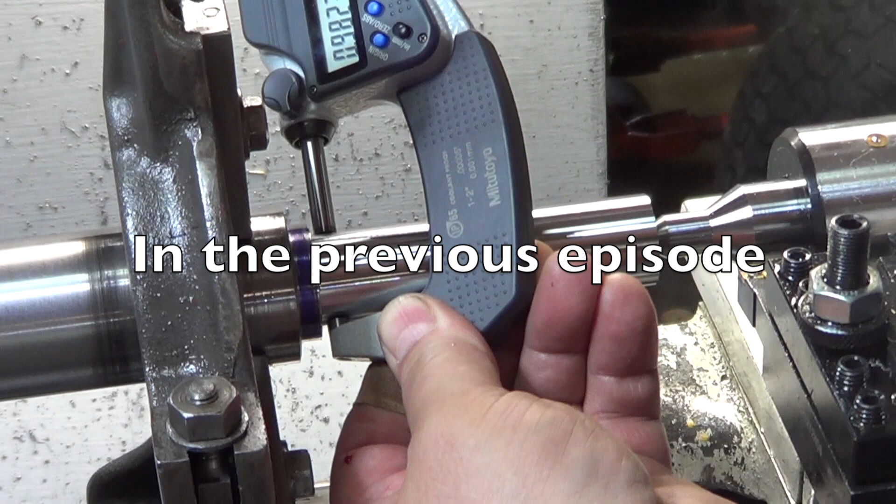I can't believe this. I overshot by 1/1000th of an inch. Oh my god.

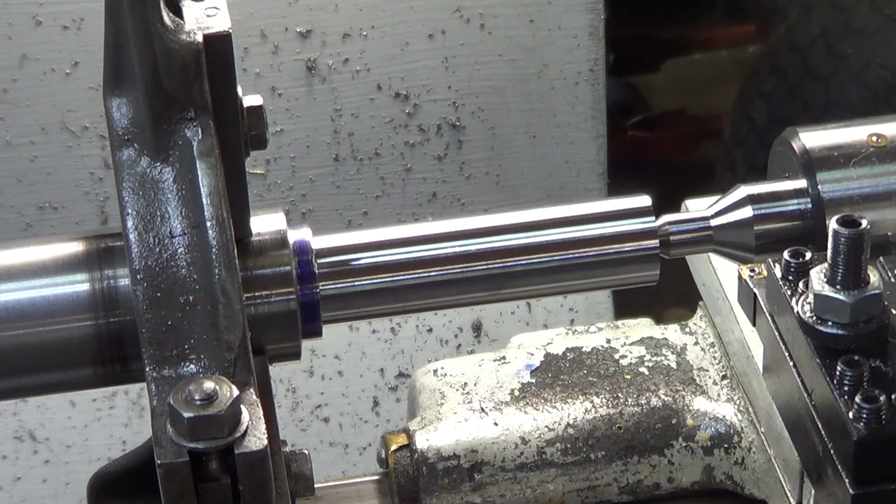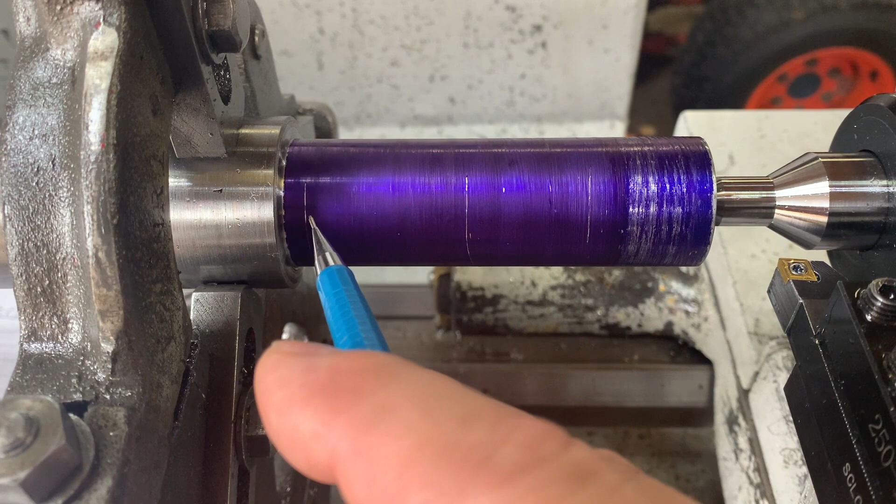So now that I've turned down to establish a shoulder for the bearings, I've made 3 marks, as you can see. That'll be the end of that. This is going to be the shoulder for that nut, and the end of the bearing journal, and this is where the taper is going to start, to the end.

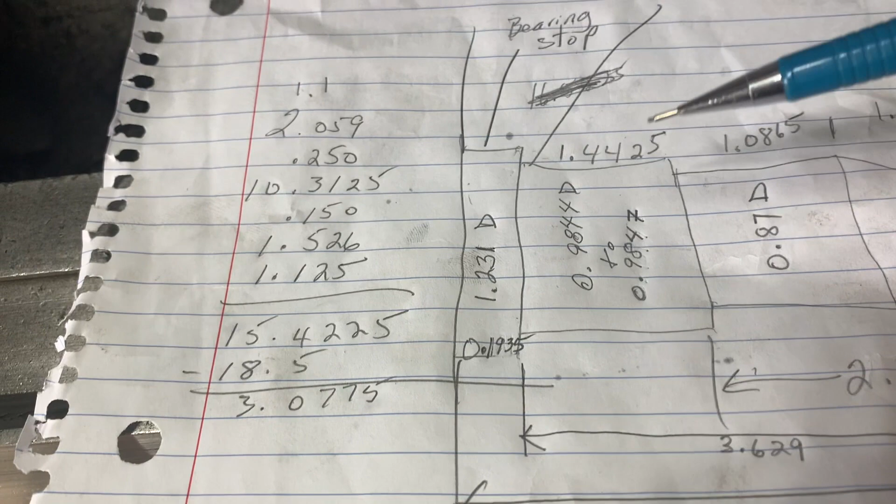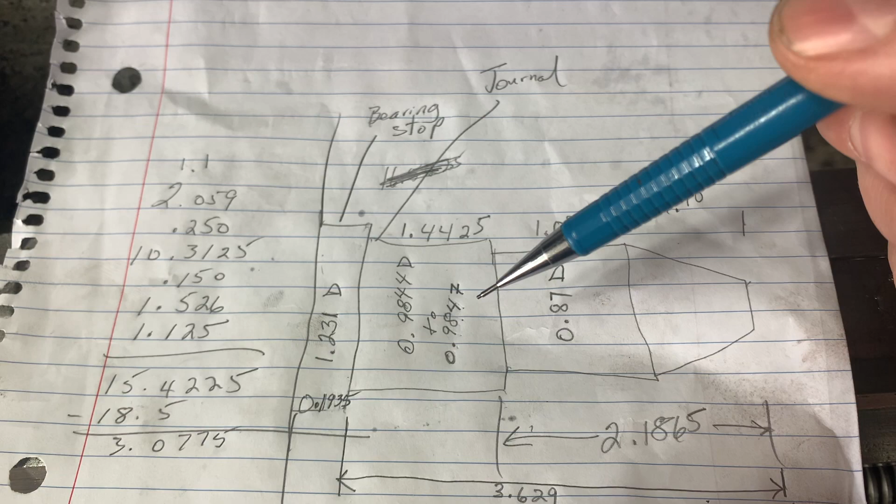This portion is the bearing journal, and it needs to meet critical measurements and tolerances. We're going to be between 0.9844 to 0.9847 to meet the high precision standards established in the machinery's handbook. So this is, other than concentricity lengthwise, the most important part that I have to make on this shaft.

It's been 3 days since I worked on this spindle because I wanted to quadruple verify all my measurements and whatnot. So now I'm ready to start.

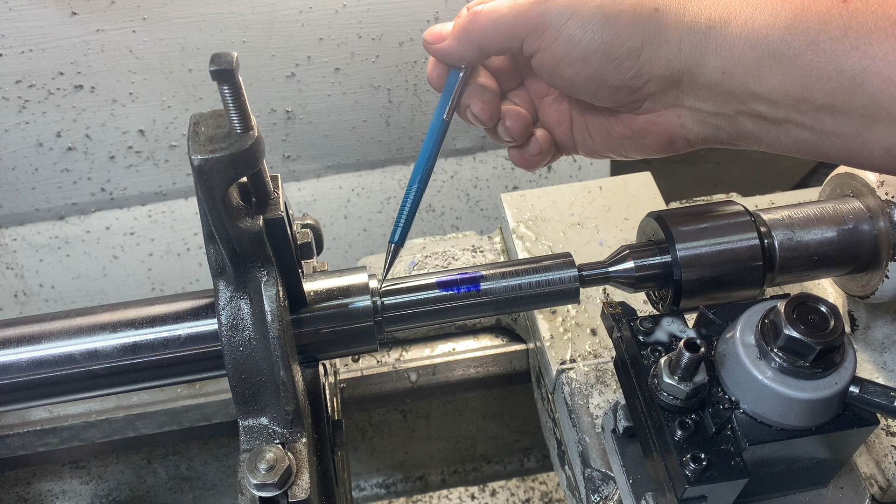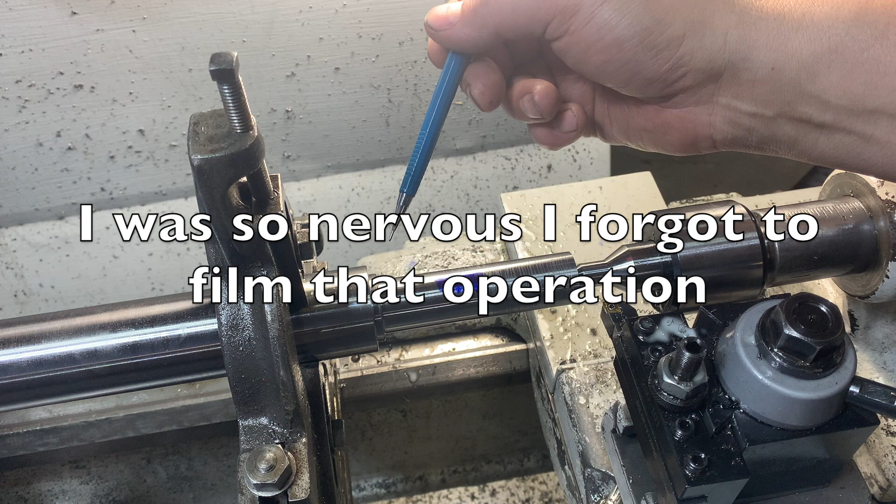So let's measure this out. I'll show you my measurements. This is the first measurement, 98485, that's in hundredths of 1/1000s. So I had to go 9847. 1.5 is good enough for this kid.

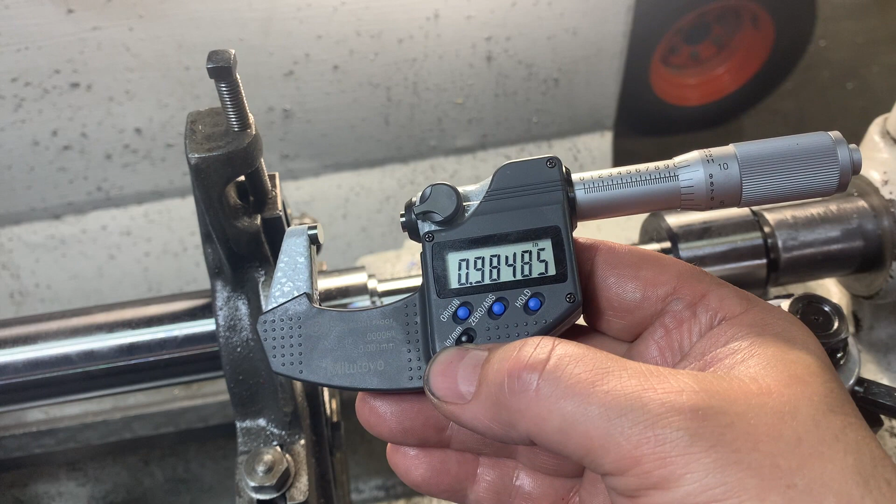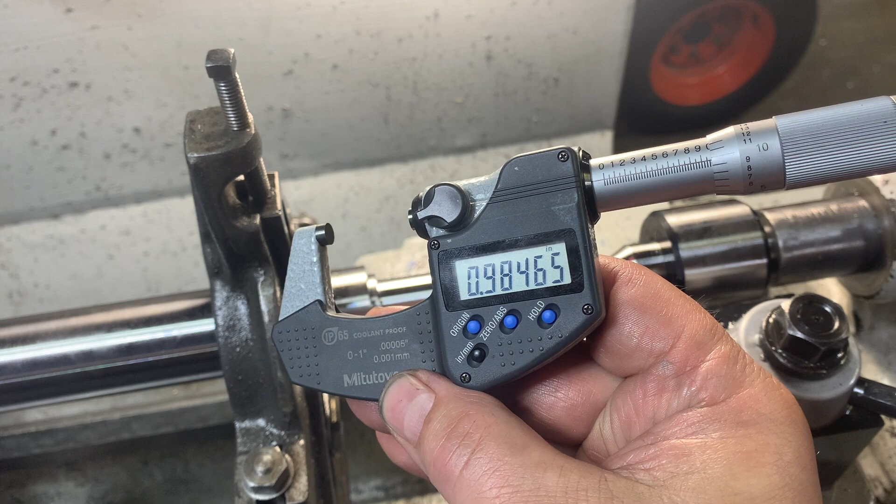Let's shoot in the middle and see what's going on there. 98440, again within tolerance. Last one. Okay, so this one is 98465, tolerance again from 3 to 7, so 6.5 is more than great.

Very happy. Okay, so we established this was my critical dimension that I needed to achieve for the bearing journal. This is the shoulder that the nut is going to sit against and provide axial preload on the outside diameter of the bearings going in that direction.

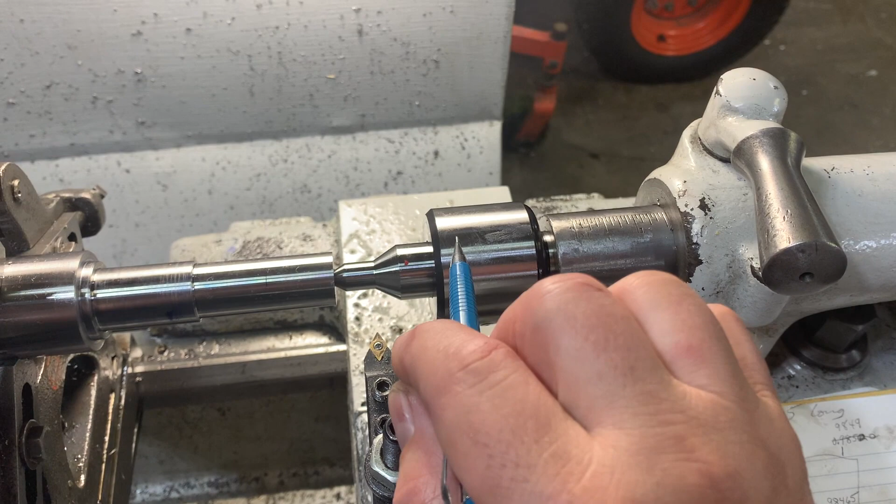So now I've turned this down already to a diameter of 870 thousandths of an inch. Now the critical time is to make the taper, which is 7.125 degrees. For best results, I'd want to keep my live center in, which means I need to have my compound going in this direction. So I may have to move my steady rest back a bit in order to clear the compound.

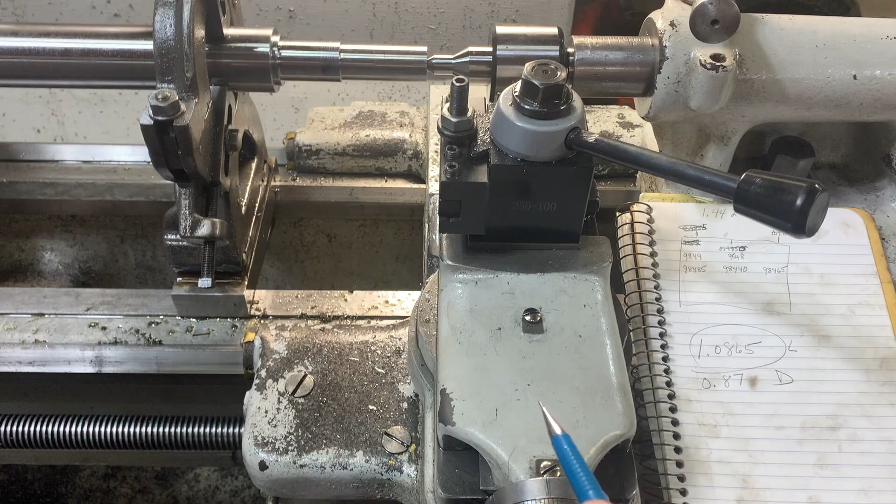So now I have to decide how I'm going to set my compound angle. There's different ways to do that. I could remove this whole assembly, but that would be counterproductive because lining this up is difficult. So I think perhaps using a compass would probably be best.

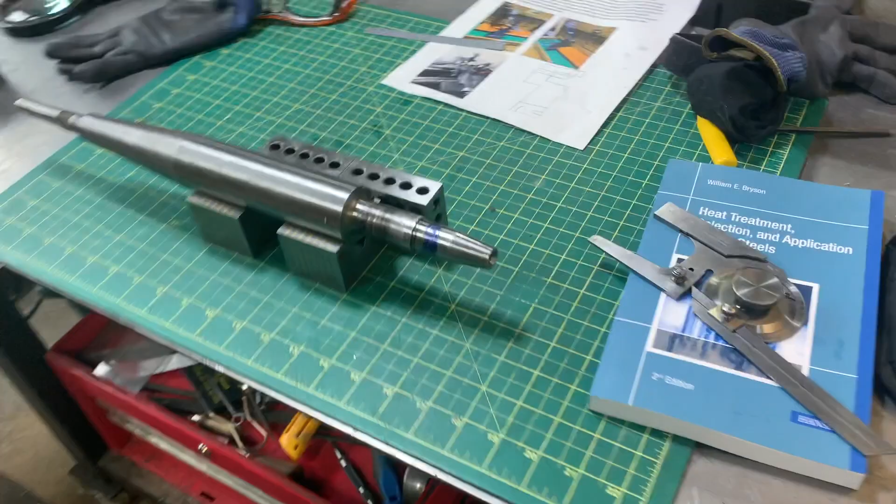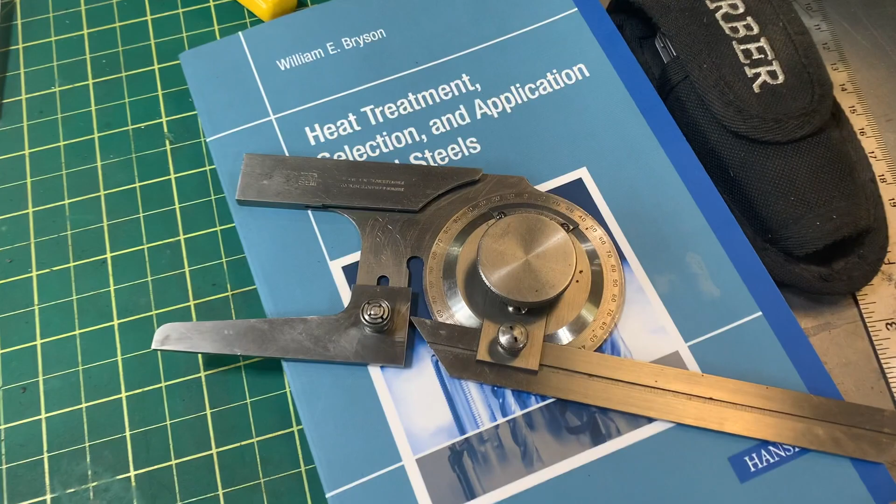So let's go to the bench for a second. All right, I've got this set up here. This is the original spindle, and I've established that this is okay. Now what I've got is one of these, and it's quite precise, a Brown & Sharpe, it's a good tool.

So basically what I did is I set up so that I could be approximately in the middle of the spindle, and then I've set my angle. Okay, so voila, I've got that.

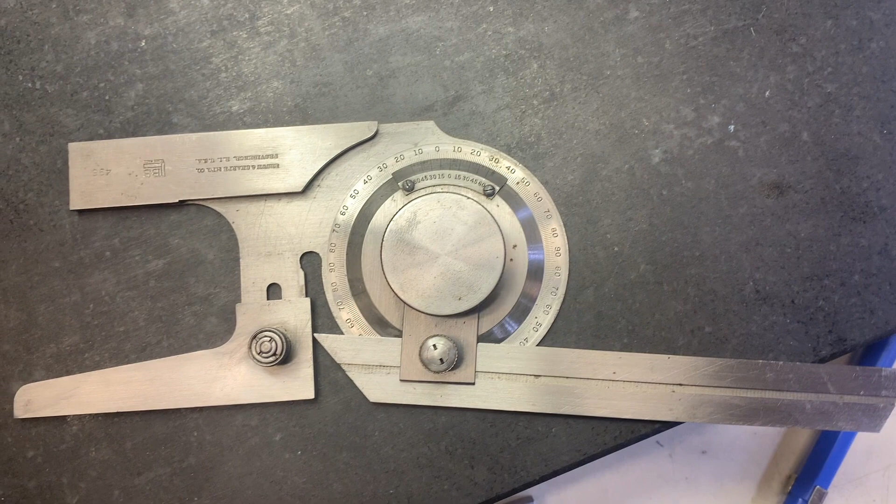All right, so what we have to look for is where that 0 line from this dial goes. If you have a real close look, it lands on the 7.1 approximately, but I know it's 7.125 because I've leaned it against the actual taper. So now I need to transfer this to my compound, and Bob's our uncle. Well, that'll be fun. Let's do it.

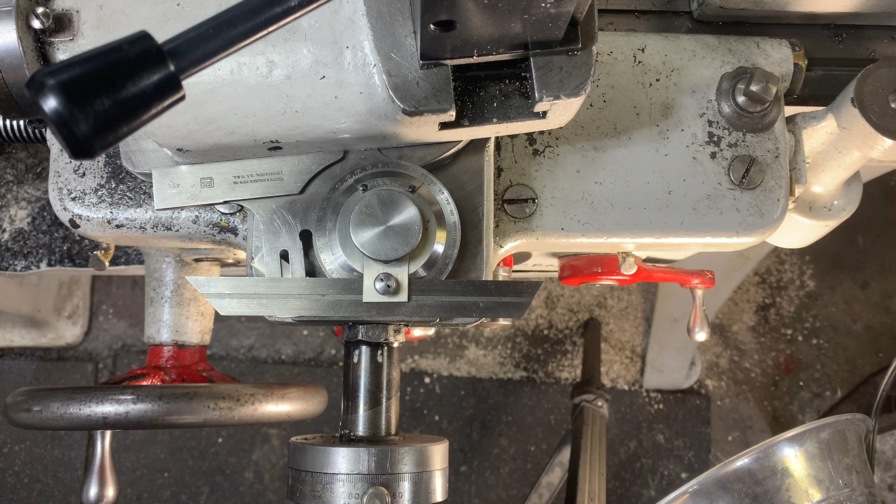Okay, so here's how I'm going to do this. I've done this actually. Usually common practice would say, okay, you take your test indicator, a really precise one, and you angle your compound accordingly until it's precisely where it needs to be. But I'm unable to do this in this case because I don't want to take the bar out of my lathe.

So what I've come up with is using this compass and lining everything up. I've got some precise angle blocks underneath to support my compass. I've got the cross feed so that everything lines up against this face at the bottom and against my compass. So I've set up a light so that I could see whether there's light against my straight edge or between my straight edge and these two things. So let's zoom in.

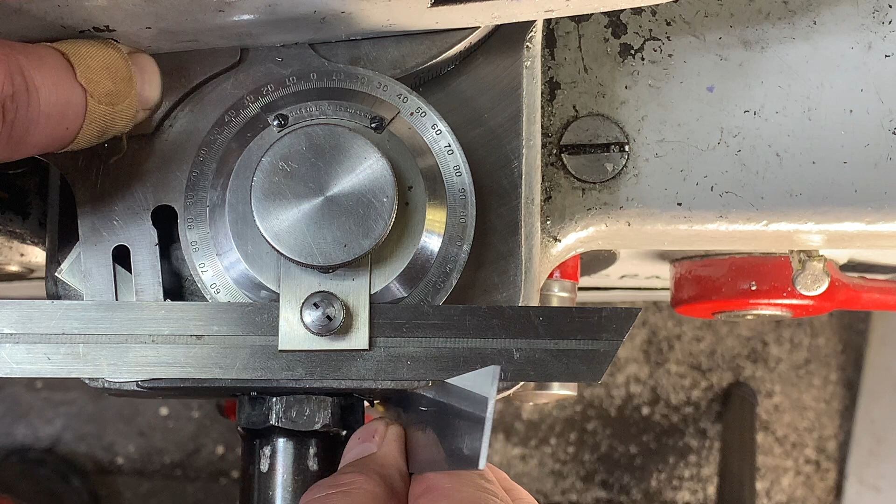All right, so what I've done is I've put my straight edge against this, and you hold this to make sure you don't mess things up, and there is no light at all on either side. I've tested this multiple times to make sure I was correct, so that's how I've decided to do this. Now this is certainly not as precise as a test indicator, but it's going to have to do. And the proof's in the pudding - if my taper fits the grinder wheel assembly, then I'm good, right? So I'm going with this, and now it's time to turn that taper.

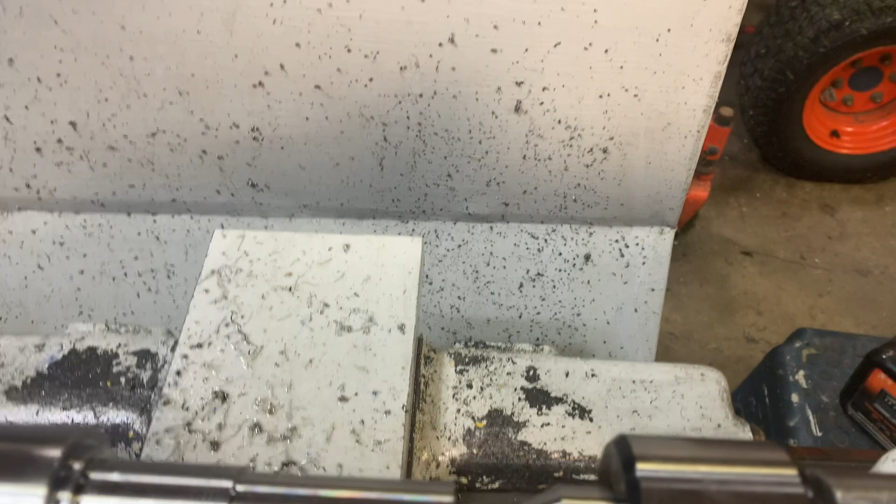All right, my compound is set up. Now, before I get started, it's really important to make sure I got my stuff together, right? I've got a tool that's going to fit inside that space all the way. I've also determined that my compound has enough travel to come all the way back to where my mark is or further, right? So that's good as well.

So what I need to do next - oh, and by the way, I wasn't able to keep my steady rest in place, but that shouldn't be an issue. All the pressure is going to be here. I'm going to take very light cuts until I get to where I need to be, at most 20 thousandths of an inch. I'm going to lock my saddle in place, and I guess it's time to take a deep breath and go for it. First thing I'm going to do is put an idiot mark on the shaft where I need to stop. So here we go.

Little bit at a time. By the way, on my left side I've got that chuck turning, so gotta be careful here. If you're gonna do this, be careful.

At this point, I'm going to start cutting from the shaft part only. Don't want to miss the mark. I'll do spring passes every time on the way back. Getting very close here. Next pass probably going to be just a couple of thousandths instead of 5.

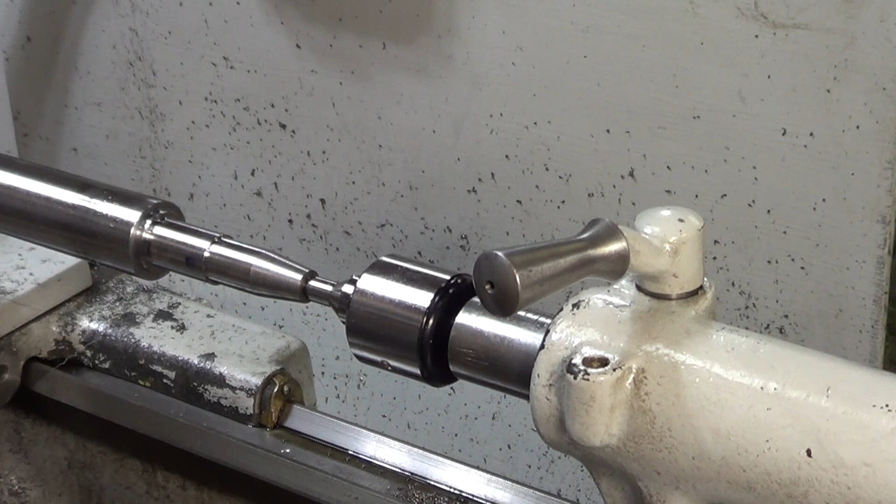Now the test, right? Oh yeah, it's pretty rough. Well, I'll take some emery cloth to this thing here in a minute and deal with that. Okay, so I'm done the taper. Time to even up the surface and make it a little shiny and whatnot. So let's do that. Sorry, I'm right-handed, so you're going to be on the wrong side of things.

Use a softer grit, give it a better finish. That, my friends, should do the trick. Doesn't need to be extremely polished here. As long as the angle's correct, that's all I need.

So now, another moment of truth. I would have to withdraw my tailstock and bring in something to test that taper. Alright, so every time you try something, you gotta wonder yourself, did I mess this up? Did I do it right? So, here it is. That's my spacer. Oh yeah. No movement. Zero. Zip. This is exactly what I was hoping for. So, I'm very pleased. Time to grab some lunch and come back and re-strategize.

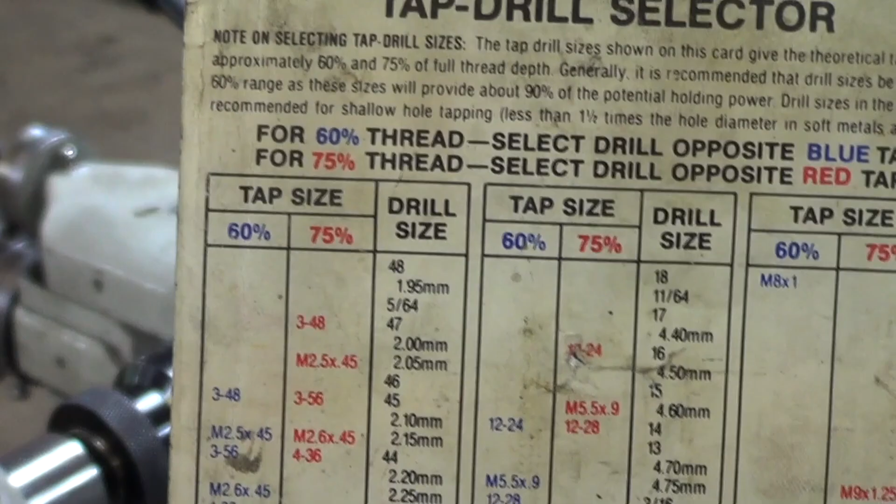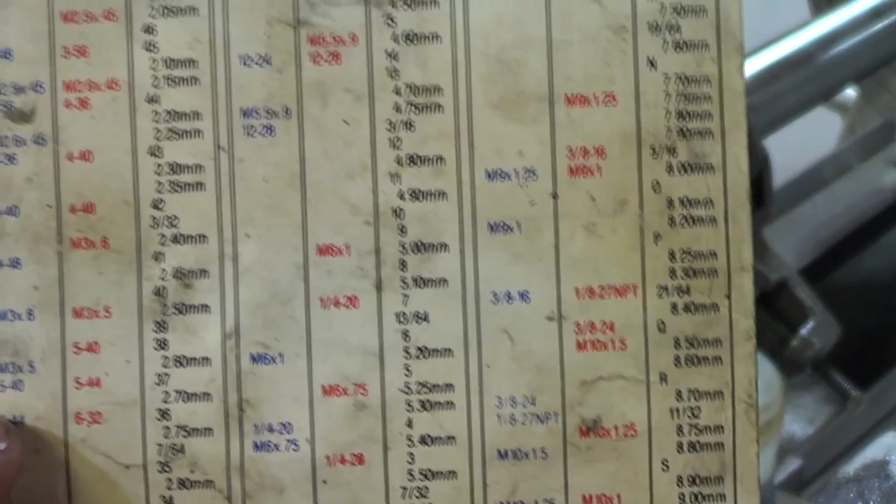Woohoo! While I'm on the topic of drilling in order to tap, because this is pretty mission critical, I'm using 4140, which is a medium hardness steel. But nevertheless, the harder you go, and the harder the metal is, your tap might have a bit of an issue with what you're about to make it do. So I'm drilling for a 3/8-16.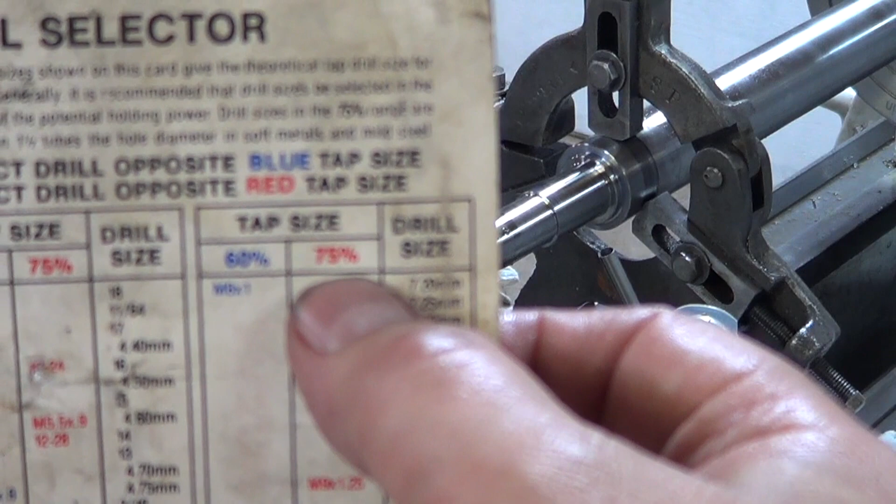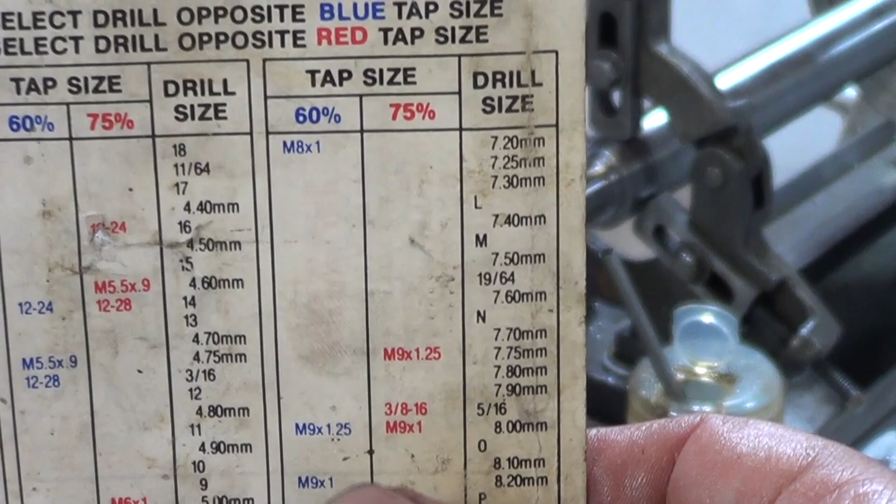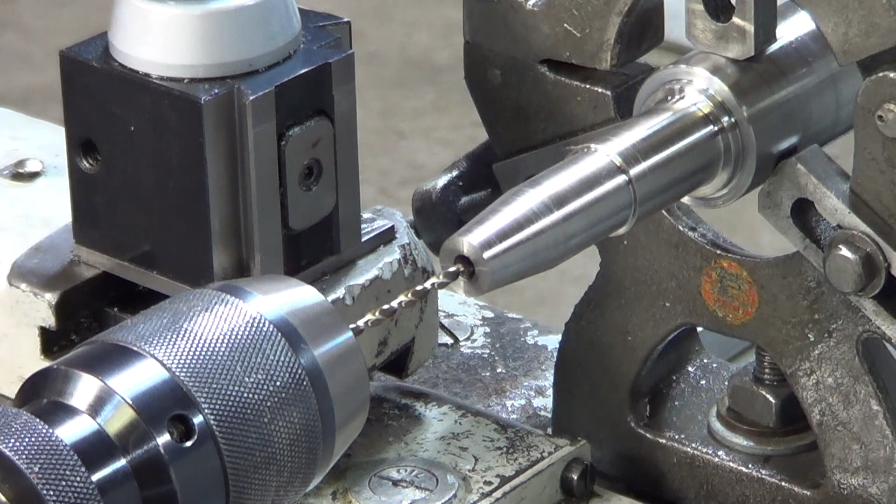And there's, as you can see here, 60% and 75%. And what does that mean? Well, that means we're going to leave that percentage of the material required - this is 60, so this is going to be a little bit looser. Unless you need something super tight, just pick 60. And then, okay, we see here 3/8-16, there it is. Move across and it tells you 21/64 for the 60%. So that's a very important thing to know, right? Just FYI. Gonna need lots of oil, so put that here right now.

Okay, here it comes.

I'm going to follow the 1 and 3 rules here. This is 4140, I don't want to mess around. If you go in there too fast, it could harden on me and really cause some bit breakage. So I'm going to keep going until it's time to tap.

Before I go right into tapping, I've decided to put a 60-degree chamfer in there, just at the entrance of the hole. That is because if I want to use a live center again at the other end, put them between two centers, I'll be able to do that, or for future uses. So that's what I'm going to do now.

Don't need a lot. Yeah, that's right. The other advantage to doing this is that now my tap's going to go in there really easily, and it won't be a fight to do that.

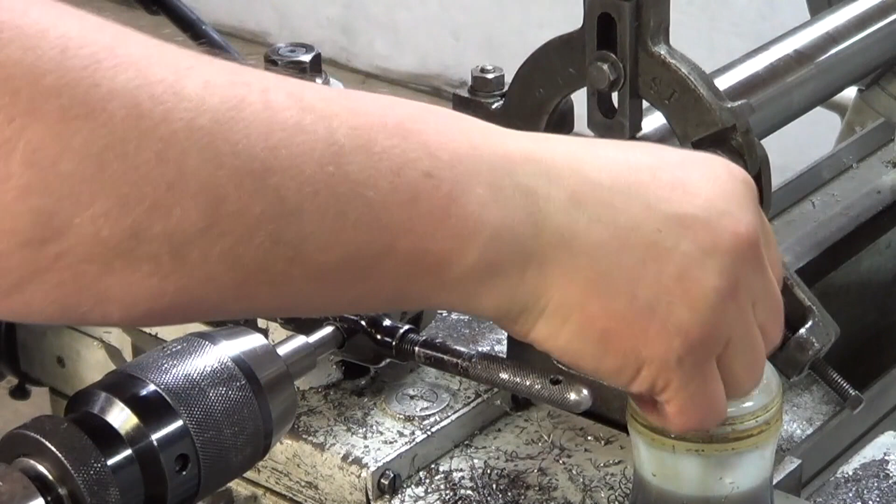So let me get a tap follower. Alright, I've got my tap set up, tap follower behind it. It's spring loaded, so it's going to help me push that and keep it nice and straight, which is always a good thing. So we should keep that clean, lots of oil, and here we go. I could use the motor, but I would rather not. Okay, that, my friends, is enough.

Okay, I thought this might be a good time to go over some of the features on my new spindle and explain why I made the modifications. This is the new one here. Of course, I just took it out of the lathe temporarily. And this is the old one. As you can see...

This shoulder is much closer to the end of the spindle, and I've added a shoulder for the bearings to sit against. The bearing journal is much shorter. In fact, the bearings actually go from here to here. This is the end of it right there. And then that nut, this one, that goes in here, will actually go up to the end of this line here.

The reason for that is I'm allowing for axial preload. To create preload, you've got to have something sitting here, that'll be the shoulder, and then something pushing against here, that'll be that nut, right? This part here on the outside. And that way, what happens is, sorry, wrong finger, but the bearing actually goes like this.

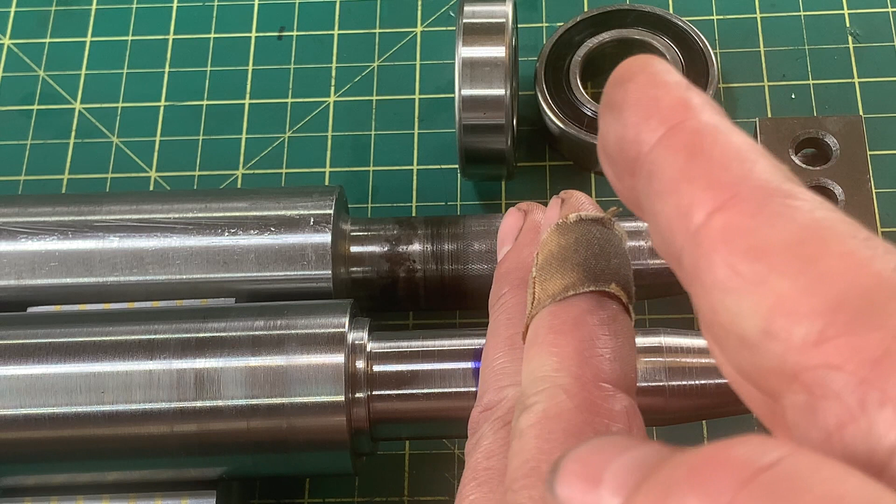There's room inside, right? There's some flex. And by pushing the two races one against the other, it creates preload against the ball bearings that sit against, like there's a raceway inside. So it makes them a little tighter, it runs tighter.

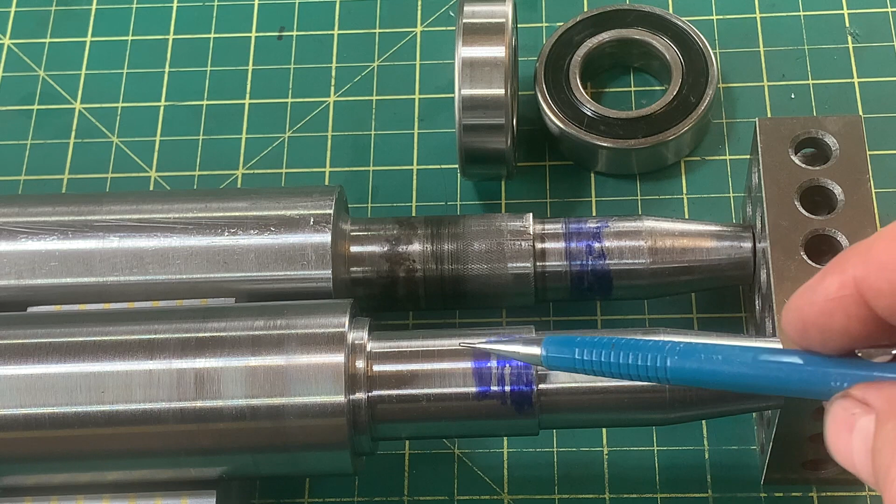The same thing is true about what's called radial preload, which is preload made by a shaft that is of a larger diameter than the inside diameter of this bearing. That way it pushes, let me see if I can reach over there, it pushes outward, right? Again, creating some preload on the outside, because the outside of the bearing is sitting against the sleeve.

So there are bearings such as these ones that can handle both in order to produce higher precision by tightening the bearings that are on the inside of all this. Because I'm making this spindle for a surface grinder, which requires high precision, I read all of the documentation from SKF regarding the tolerances that this bearing can take and how it can perform given a certain amount of preload applied onto it. With that documentation and what I read in Machinery's Handbook, I was able to come up with the sizes that I've been using. So if you're curious about what preload is, now you know.

It took me a fair bit of reading to decipher all that stuff because I'm new at this, but it's well worth reading if you... Okay, I might as well show you this.

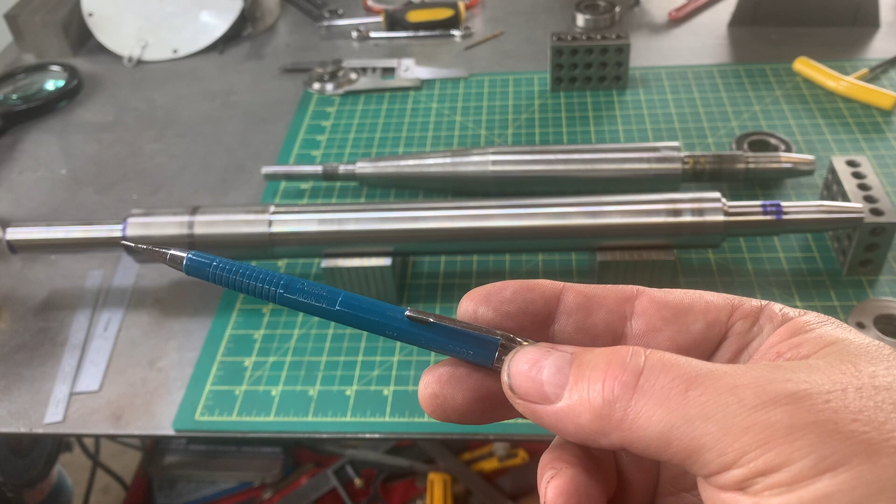Of course, the material that I've used for creating the new shaft was 24 inches long. The original shaft is 18.5 inches. When I started the project, I was working at that end over here, and I overshot the bearing journal by 1/1000th of an inch, so I ended up being too small.

So what I did is I flipped it around, created this. It gave me a chance to practice, so that's okay. And so now this is all done on this end, and I can go over here. So I'm going to measure 18.5 from here to there, cut the shaft, and then put that back in the 4-jaw chuck, get everything trued up, and perform the various operations that need to be done here in order to get what's over here, which is the back end.

That's the pulley end. This is the other bearing journal for the back bearing, and then some threads which are of equal diameter to this bearing journal. That should be a whole lot of fun.

Here we go. Okay, I'm about to go into combat with this thing. So I've been saying 18.5. It's actually not 18.5, the whole shaft is actually 17 and 15/16. I was giving myself extra room to wiggle with.

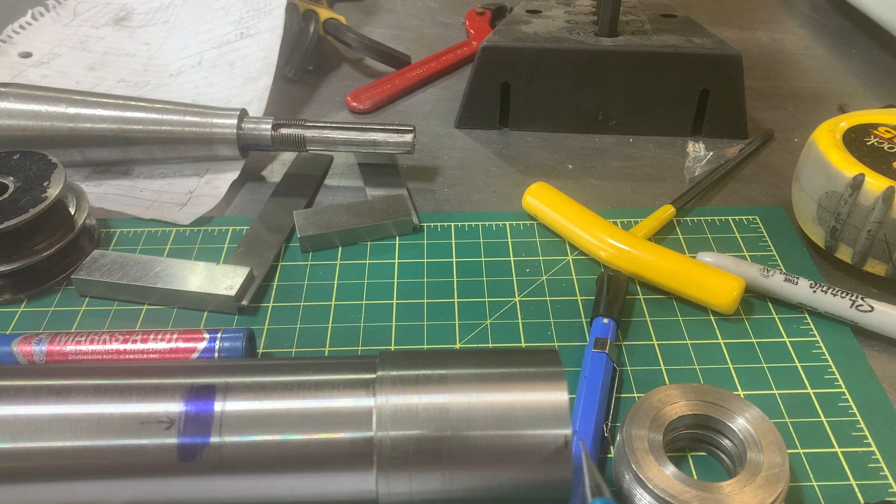So this here marks the location where I could put my 4-jaw chuck for concentricity aspects, but I think I'm going to put it there just to be safe, and then it's going to make this shorter and of course sturdier, which is a good thing. All right, so what I've done is I've measured all of this out, and I need to make 17 and 15/16. I need to face this up to this line.

So the features that I need to make are nominal, except for the bearing journal, right? Everything else, there are things missing. For example, this is too wide for the bearing, and it should have a shoulder, so I'm going to add a shoulder to my design.

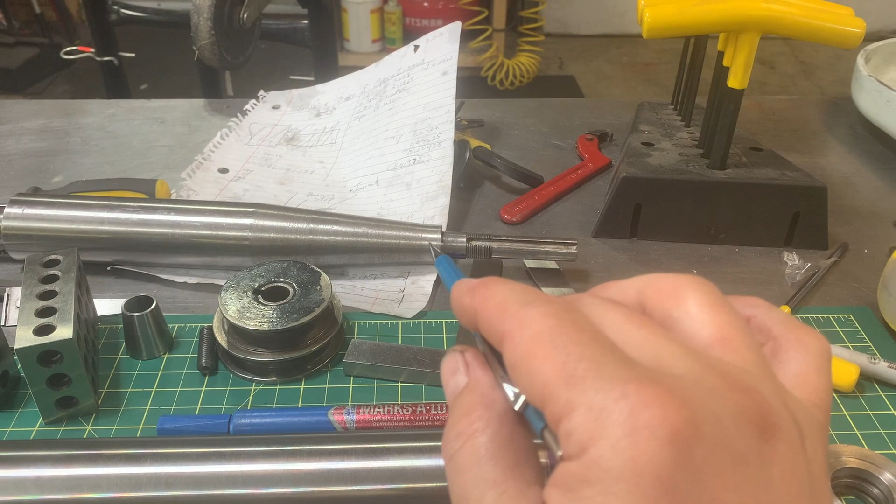This I need to make in order to get into that space in the housing, and the rest is nominal, meaning it doesn't have to be super precise.

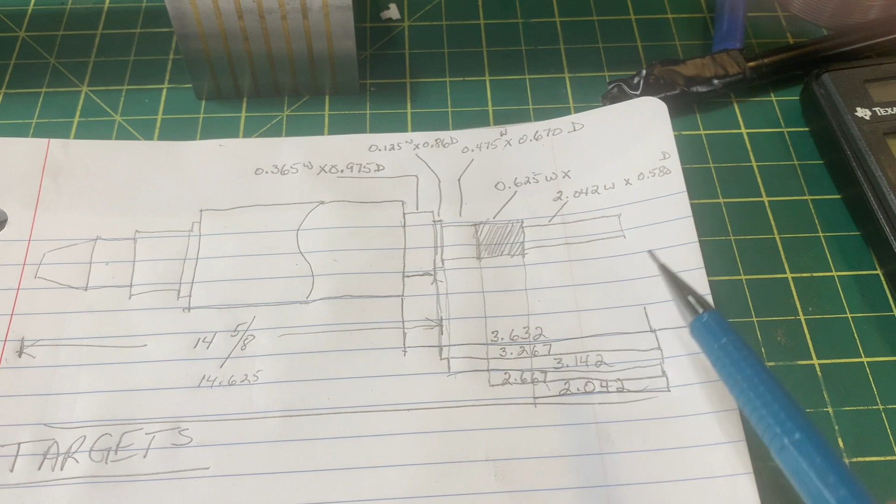Okay, so here's the design. The little S here means I've chopped out a particular length of material. And what I've done is, once this is trimmed to 17 15/16, the measurements for each of these things, I've given myself targets by drawing this little diagram. It just makes things easy.

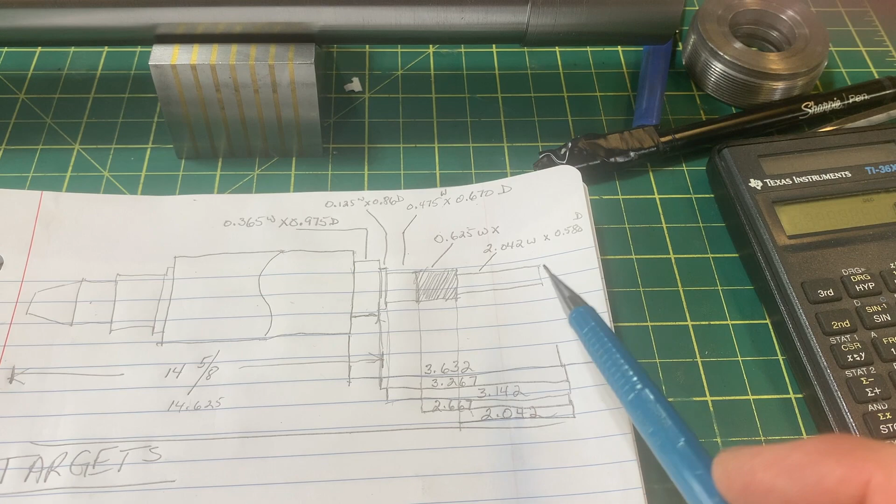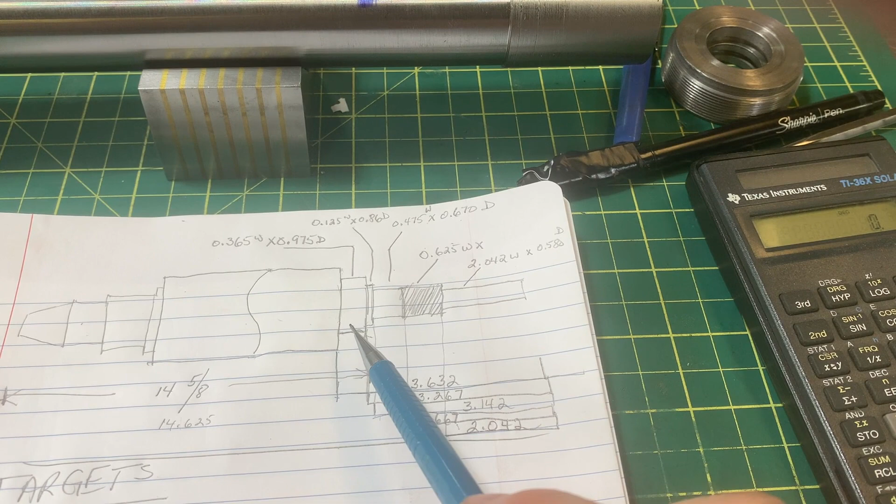Because the first thing I'm going to do after everything is lined up and concentric is turn down and reach here, to clear the housing on the inside. Then I'm going to create this shoulder for the bearing inner diameter ring. Then this is the critical bearing journal. This thread is actually the same diameter as the journal, so that should be interesting.

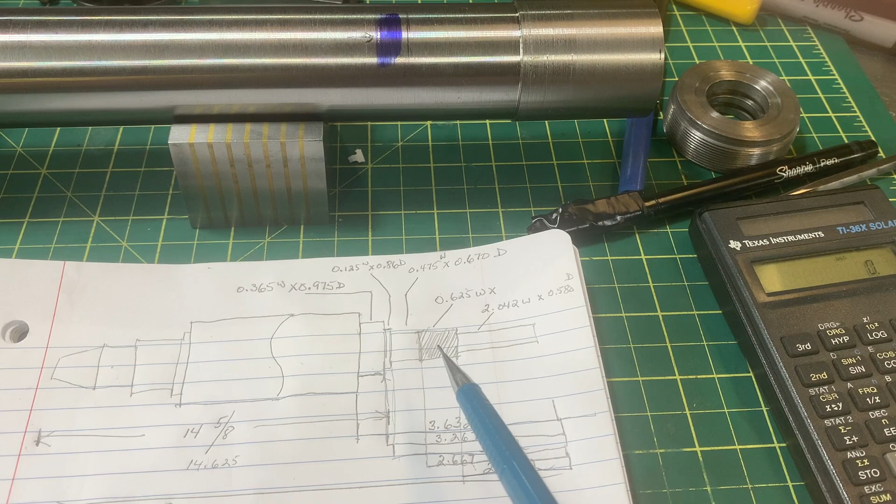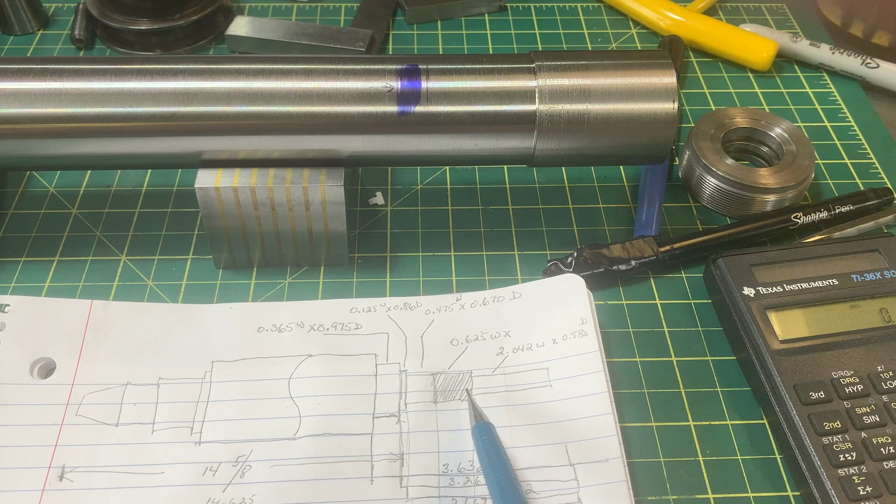I might practice beforehand, or I'm not sure. Unfortunately, this is not a standard thread. It was custom made, and because of this pulley journal diameter, I don't have much choice but to recreate this thread pattern. And of course then there's this, which is to my discretion, but the diameter is not.

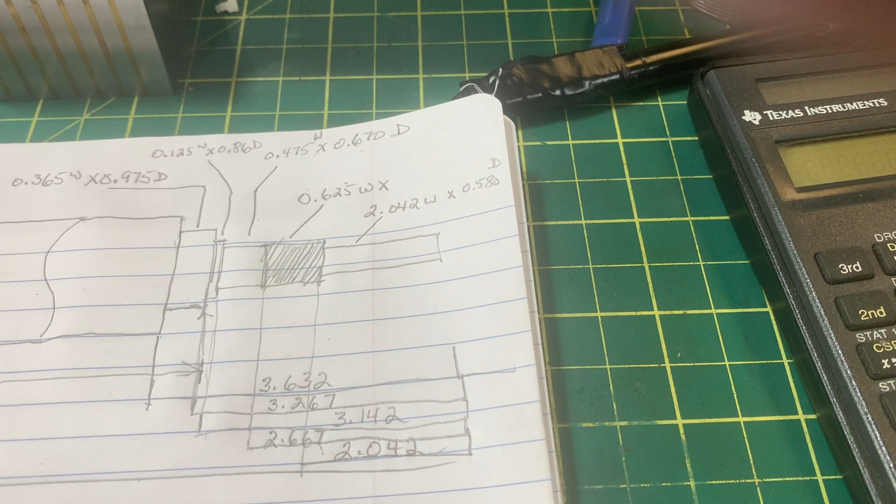Okay, so that is how I'm approaching this. Here are my calculations, should you be interested. And now it's time to put this in there and line things up.

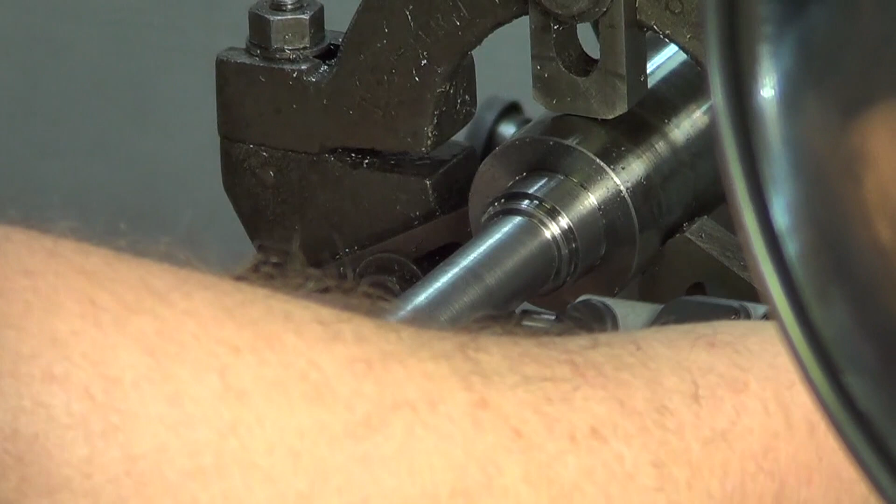Okay, this is completely cool now, it's just been like 15 minutes. So I'm taking my measurements again. Go as close as I can to the shoulder, because that's where the bearing's going to sit. I'm at 692.95.

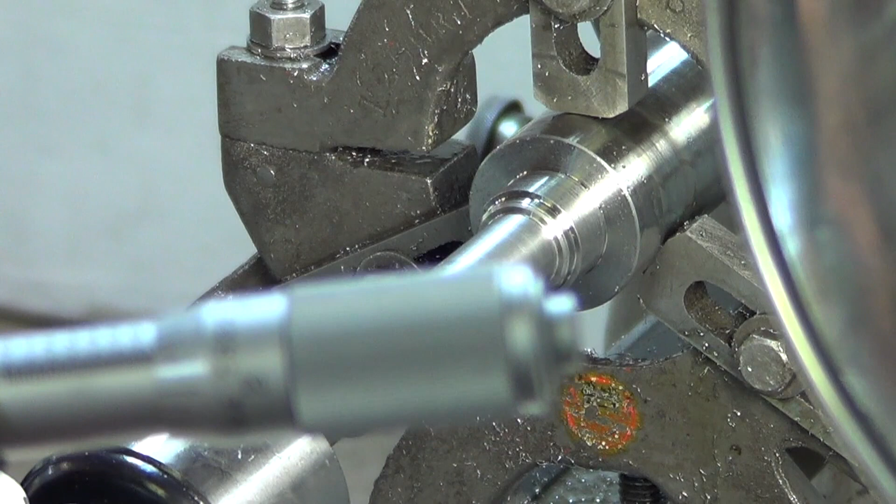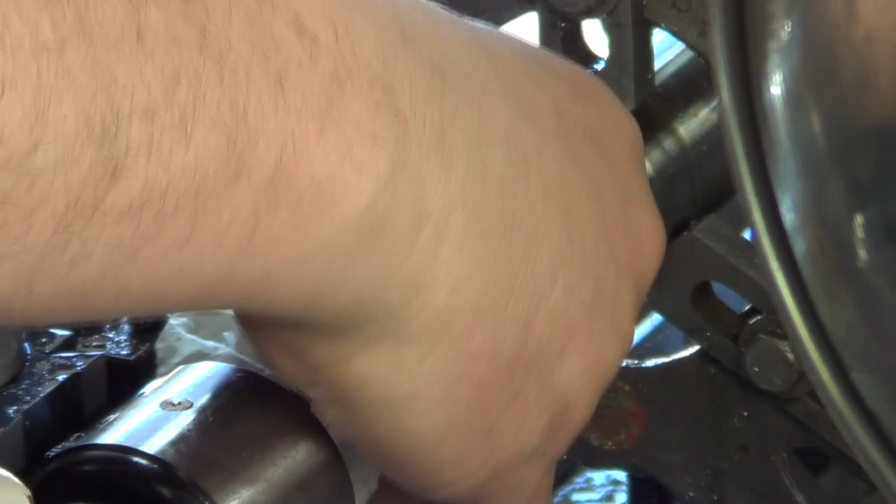Okay, so I had 22.95 thousandths to go. I just took a 15 thousandths cut, and that should leave me 7.9 thousandths of an inch. So we'll see. I'm making sure the shaft doesn't get too hot—see, just warm enough that I can still touch it, because I don't want false readings.

Okay, so this here is indicating right on the money. You can see that here. So my final target is 670 thousandths. I've got 7.6, I thought 7.9. So I'm on target.

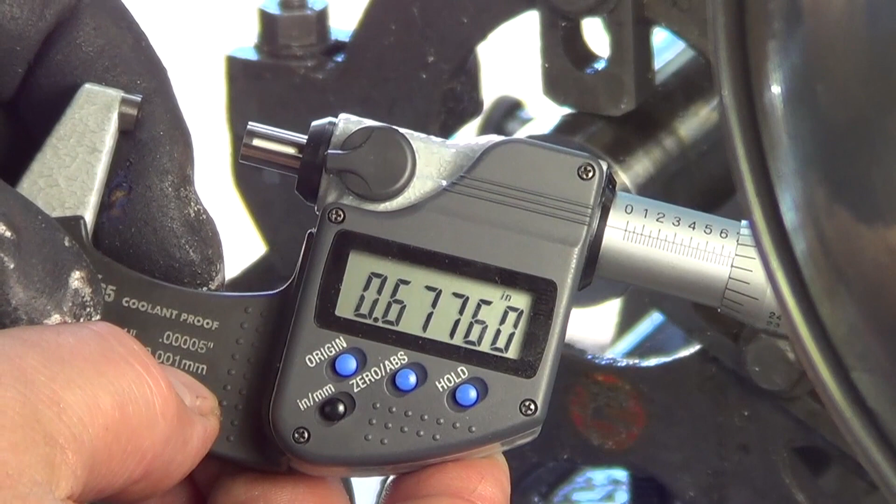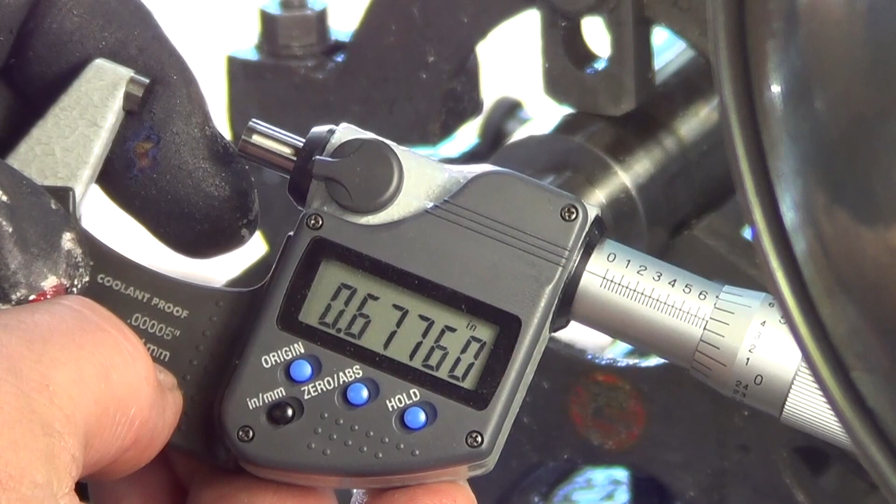Now I'm going to—this is where it gets a little rough. So either cut, probably 5 thousandths of an inch, and the rest will be emery cloth. And I'm going to subtract 1 just to be safe. I don't want to mess things up. I'd rather have more and cut more later than not enough, right? So okay.

This is time to be really meticulous. There we go. I'm cutting 4 thousandths. Okay, my dial was at 184. I'm going to put it back there.

Okay, now this is going to take time. Not the most outstanding finish here, but that's okay. When you take really light cuts like that with a carbide tip, it's not always wonderful. That's okay, so take a quick measurement.

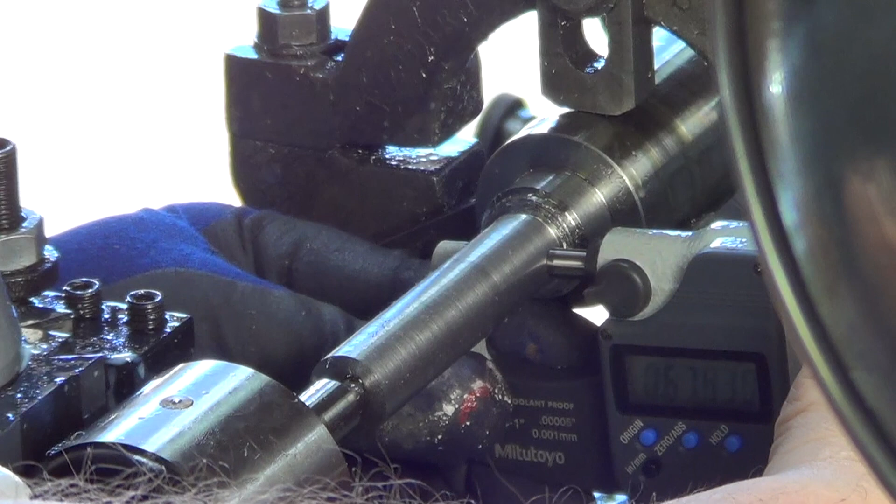Wow, right on target. Okay, so I'm at 671 thousandths and 1/10, 1.5 tenths. Perfectly acceptable. So now what I'm going to do is let this cool down completely, and then it'll be emery cloth time. So I'll bring you back.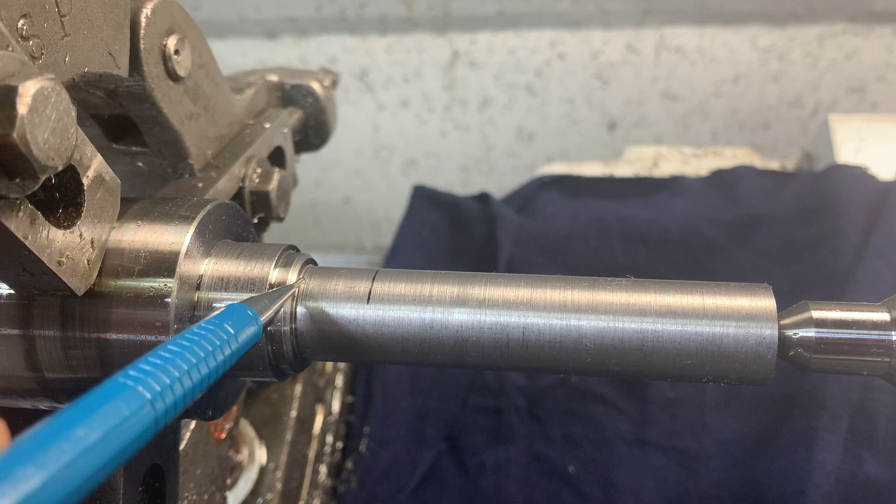Before I use the emery cloth, bring this down 2 thousandths of an inch, actually 2.45. This is where the bearing is going to sit, so that'll be the journal, and this is all I really truly need to polish down. From here to here, about 5/8 of an inch is going to be threads, and they're going to be the same diameter as this, so I can go over this, there's not an issue at all, and then this is going to get taken down for the pulley.

So with no further ado, here's what I'm going to do. I'm going to use some 400 grit emery cloth, and then when I get close to my target, I'm going to use 600 grit just to give it that final polish. So at this point, it's very important to take my time.